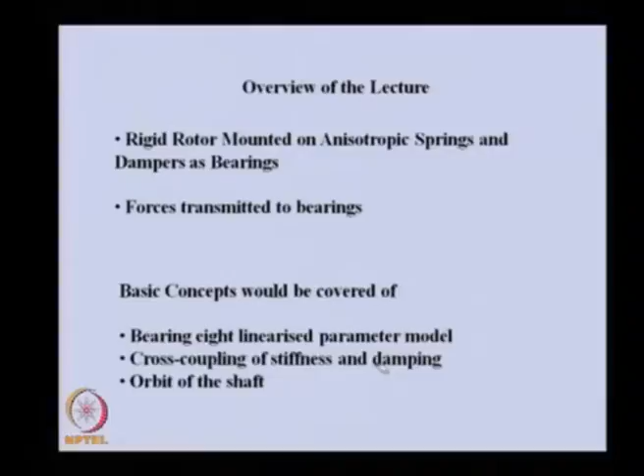This is a rigid rotor mounted on an anisotropic spring and damper as bearings. Then we will also study the force transmitted through the bearing from the rotor, and we will cover the following concepts in this lecture: bearing linearized parameter model, cross coupling stiffness and damping, and orbit of the shaft.

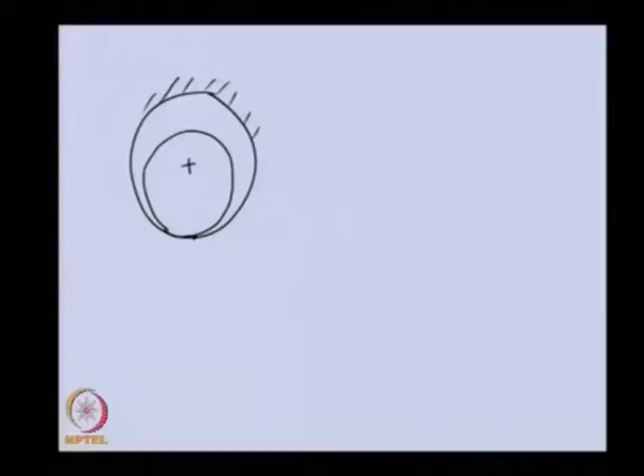So, let us take a hydrodynamic bearing, and in this particular bearing, this is the bearing center. When the journal which is inside is not rotating, then we expect it will be resting at the bottom of this bearing, where omega is 0 for this particular case.

But when this particular speed increases, you can see whatever fluid is here, in the clearance, it will try to go into this particular wedge, and because of this the pressure will be generated at the wedge, and this particular journal will lift inside the bearing.

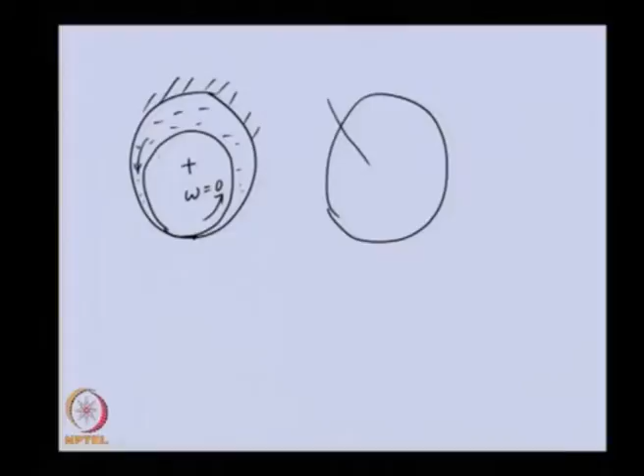So I am drawing a particular configuration in which the journal is rotating at a particular speed, and it has taken some equilibrium position inside the bearing.

Now you can see that because of the rotation of the journal, the fluid is getting pumped into this wedge part, and because of that the pressure is generated in this region, and the weight of the journal is supported by the pressure generated in the fluid film.

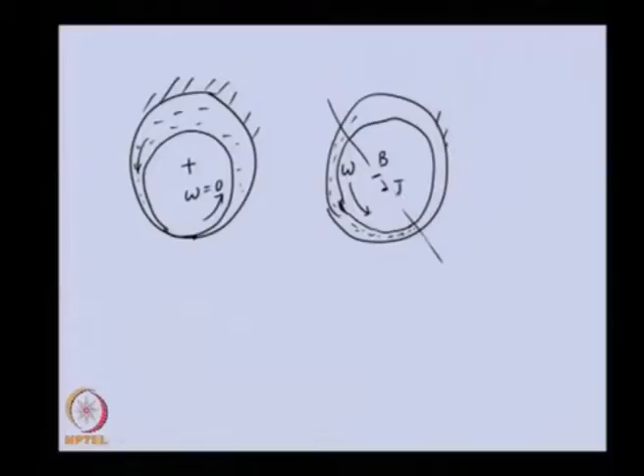In this particular case, let us say this is the bearing center and this is the journal center. This journal center and bearing center are offset by some amount. Let us say Bj is the radial eccentricity, and if we draw a vertical from the bearing center, this particular angle is called the attitude angle, which defines the position of the journal.

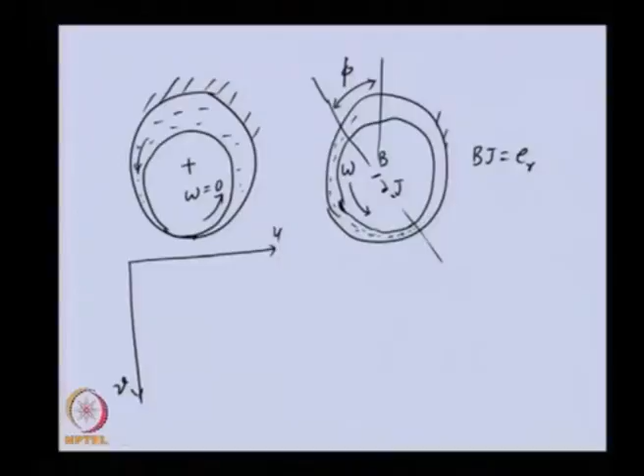So if we want to plot the journal motion, how it changes its location with respect to speed, because for a particular speed it occupies a certain position inside the bearing, you can see that at rest it is here. This is the journal center, this is the bearing center.

Now, as speed increases, it changes its position, and theoretically, when speed is at infinity it reaches B, meaning both the journal center and bearing center will be at the same place. So we can say that as speed increases, the shaft center takes this particular path, and for one particular speed it will occupy this particular position, and this is the radial eccentricity which we have drawn here, the Bj.

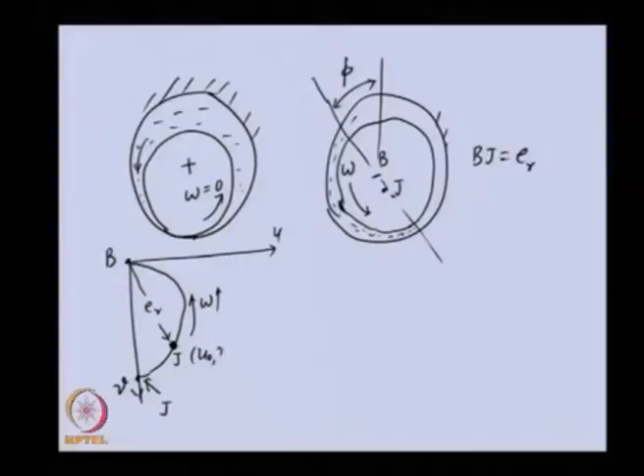This is the general position. Let us say at equilibrium, for a particular speed, its position is given by u naught and v naught. This is the attitude angle. So e_r and phi define the position of the journal, or we can also define it with respect to v naught and u naught.

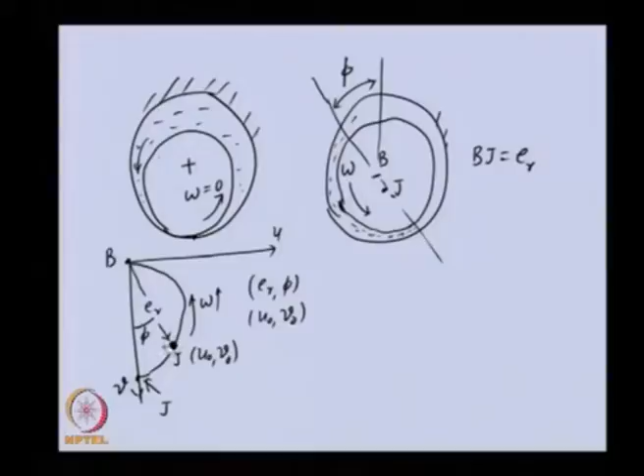Now you can see that when we are changing the speed, this particular journal changes its position, and if we talk about how the fluid film is imparting stiffness and damping to the rotor, obviously we expect that when we change the speed, when the journal position changes, it will have different stiffness and different damping properties. So now let us analyze these.

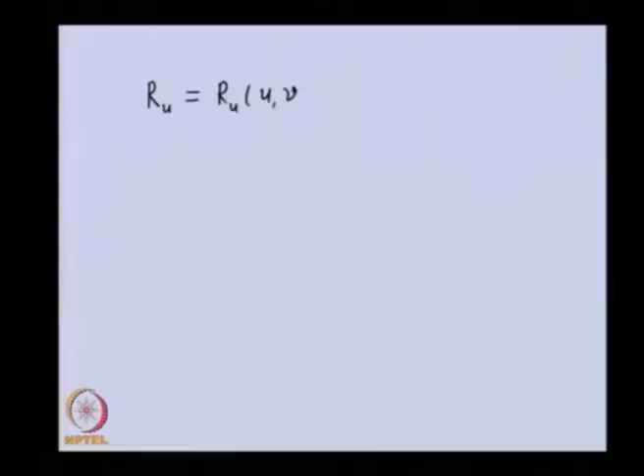The fluid film which is giving a reaction force onto the journal is Ru in the horizontal direction, and this reaction force is a function of the position of the journal and the instantaneous velocity also. The fluid force in the vertical direction is also a function of these quantities.

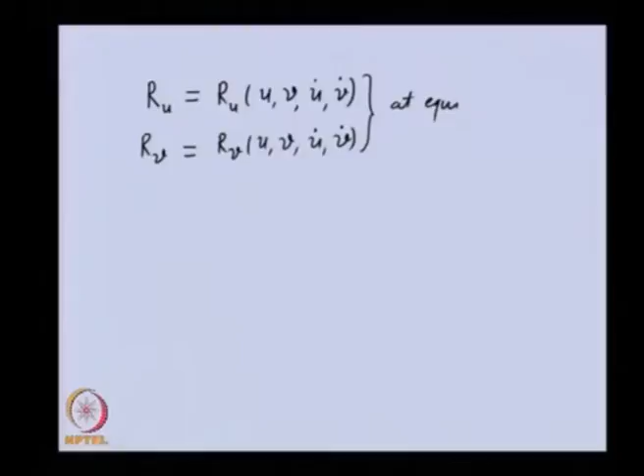So, these are the reaction forces which are coming from the fluid film onto the journal. Now, this is at equilibrium position, let us say, that means it is at, let us say, u naught and v naught.

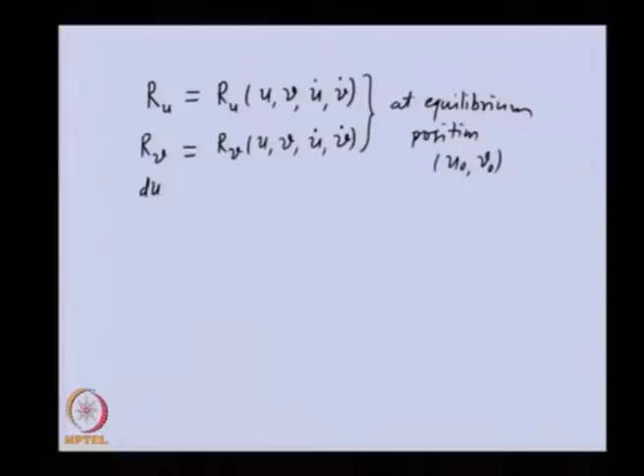If we are giving some kind of perturbation or disturbance from its equilibrium, then let us say we are giving perturbation to each of these by du, dv and its velocity components to each of these variables. So the fluid film force now will be written as, so this fluid film force we expect that it will be changing because of this disturbance.

Like this. Similarly, this particular one is in the u direction, similar variation will be there in the v direction also. This particular function we can able to expand using Taylor series expansion.

So, let us say the reaction force in u direction due to the equilibrium position plus the variation components. So this is the variation in du, then variation in dv, and the velocity components. These are the velocity components.

Similar variation we can able to express in the v direction. So this will be v plus dv.

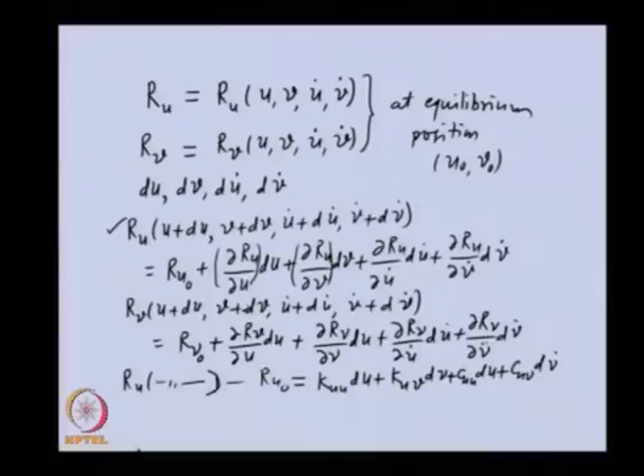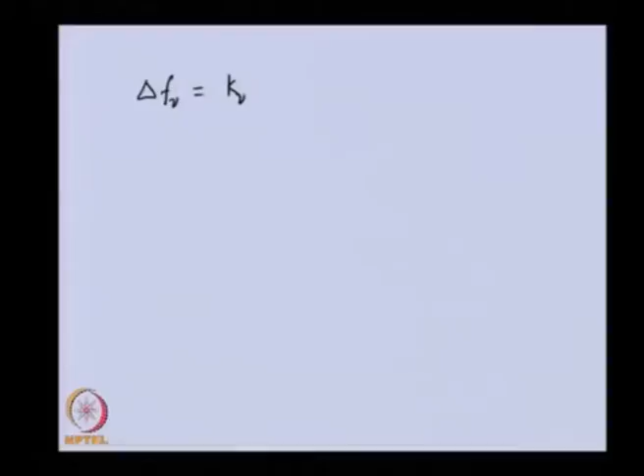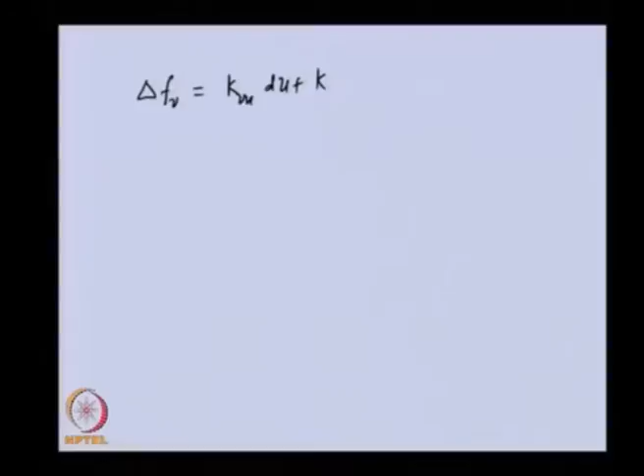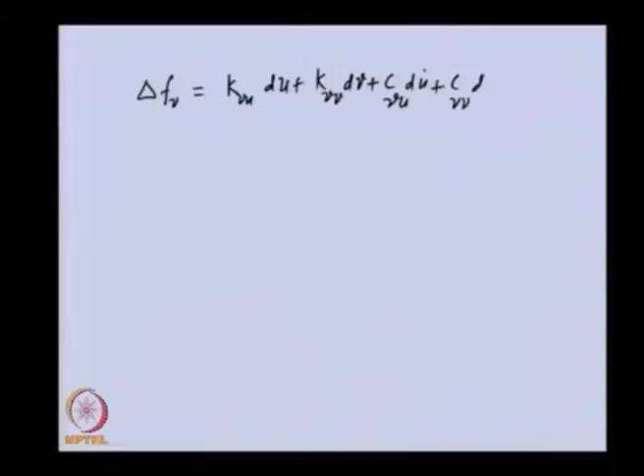So you can able to see that this k and c which we have represented, this is representing the change in the force for a small perturbation in the displacement, and this is representing the change in the force due to the change in the velocity.

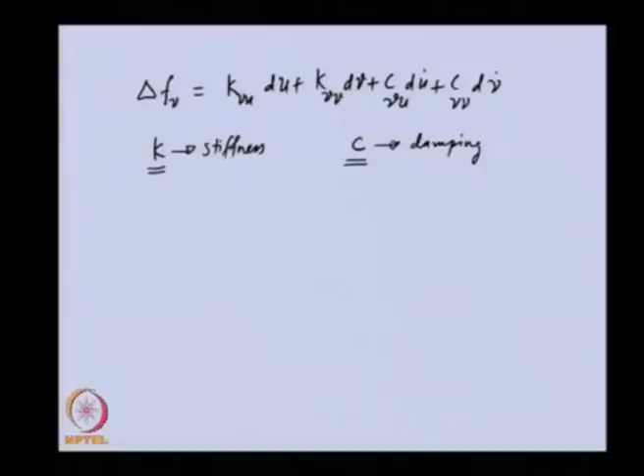So actually this is nothing but the stiffness, which is defined as change in the force with respect to the displacement, and this is the damping coefficient, which is defined as change in the force due to the velocity. So these are stiffness coefficients and damping coefficients.

So if we take one particular coefficient, let us say u v, this is representing change in force, fluid film force in u direction, divided by change in displacement in the other direction, that is in the v direction, because I have taken the different subscript v direction. So this particular stiffness...

So this particular stiffness is the k u v I have defined, in which we are taking the force direction u, the change in force in u, and the displacement in the v direction. So this is a cross coupled term.

So in this particular case, if we are considering a rotor which is supported on such a bearing, hydrodynamic bearing, if you are giving a force in u direction, that is horizontal direction, there will be displacement in the horizontal and vertical direction also.

So, that means if you are giving force in the horizontal direction, displacement will take place in that direction as well as in the vertical direction. When the displacement is taking place in the other orthogonal direction, those terms are called cross coupled terms, and those terms which are giving displacement in the same plane are called direct terms.

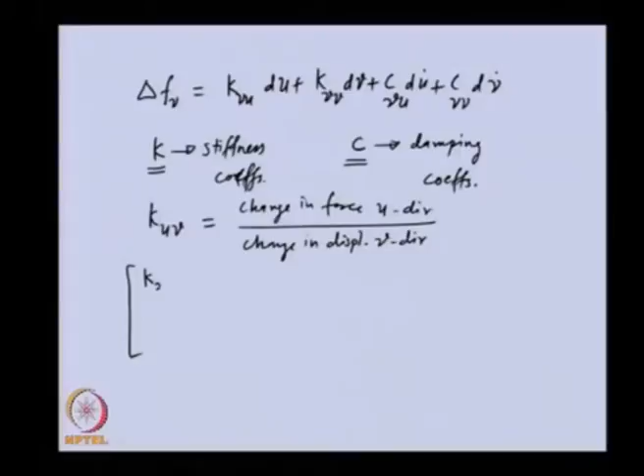So, in this particular case, we can write these coefficients like this, because we have defined four stiffness terms and four damping terms. You can see this u, KUU, KUV, and this is KVU, and this is KVV. So these are the four stiffness terms, and similarly we have four damping terms: UV, VU, and VV.

So in this, this and this are called direct stiffness coefficients, and these two are called cross coupled stiffness coefficients.

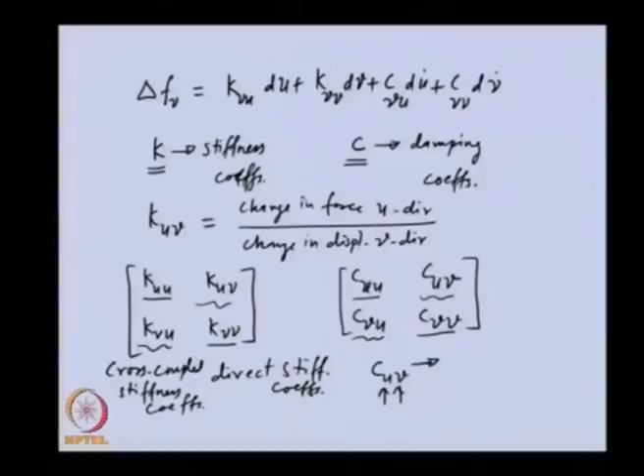Similarly, here these two are direct damping terms, and these are cross coupled damping terms. So if we want to define CUV, this is the change in force in the u direction due to change in the velocity in the v direction. So change in force in the u direction due to change in velocity in the v direction.

Generally, these stiffness and damping coefficients which I defined for fluid film bearing, we have seen that they are 8 in number, 4 for stiffness terms and 4 for damping terms. They can be calculated by either calculating the change in the fluid film force for a given displacement in a particular direction.

This change in the fluid film force can be calculated using the lubrication theory, using the Reynolds equation, or sometimes people perform experiments where they give particular displacements or velocity and measure how much the fluid film force changes. With the help of these ratios we can get these stiffness and damping coefficients.

Now, once we have the idea of this particular model, we will analyze a rigid rotor which is mounted on these kinds of bearings having 8 linearized stiffness and damping coefficients.

In this particular case, you have seen that when we expanded these expressions using the Taylor series, we retain only the first derivatives; higher derivatives we neglected. So basically we have linearized the fluid film forces, which are actually nonlinear in nature, so that we can do some kind of analysis by which we can understand either the critical speed calculation of the rotor, or even do the instability analysis in subsequent lectures.

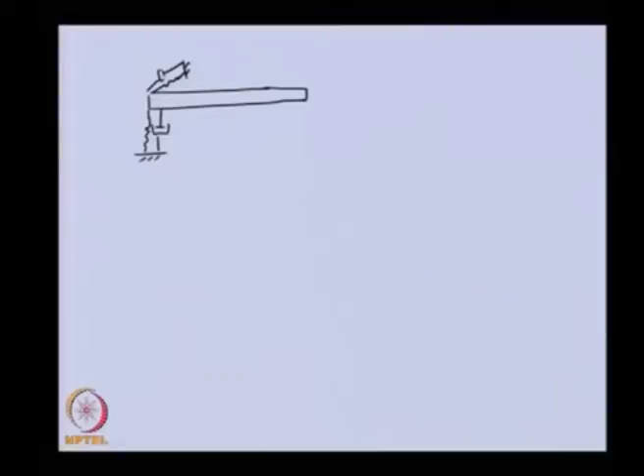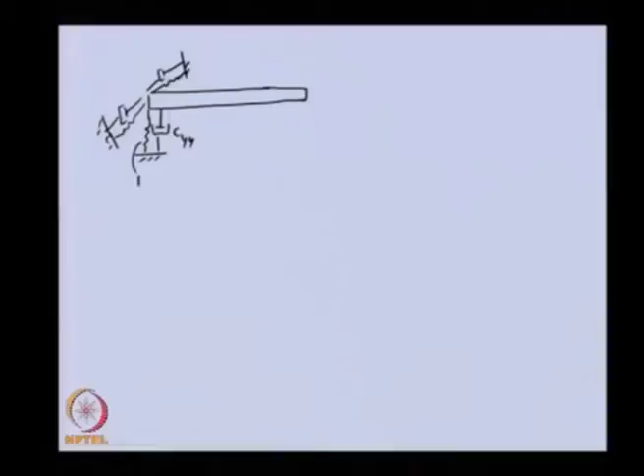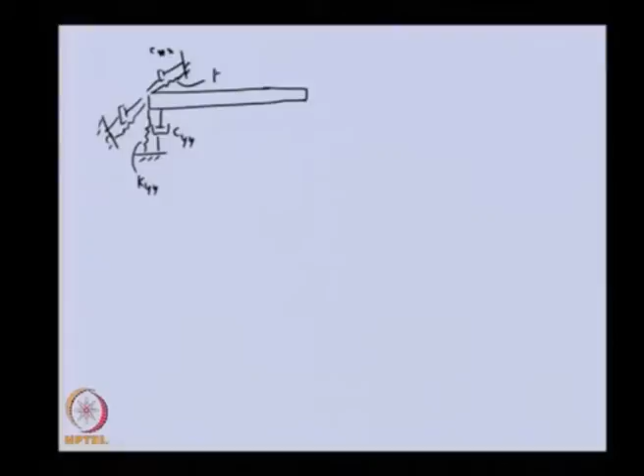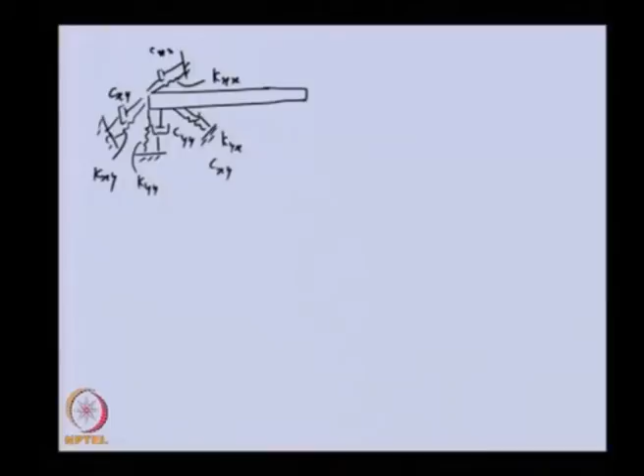Apart from these we have cross coupled stiffness and damping terms. So let me write this as Cyy, this is Kyy, this is Cxx, and this is Kxx. This is the cross coupled term: let us say this is Cxy and this is Kxy. Similarly, we will be having another cross coupled term: so these are Kyx and Cyx. And this is one end of the bearing; similarly, the other end of the bearing will be having these terms.

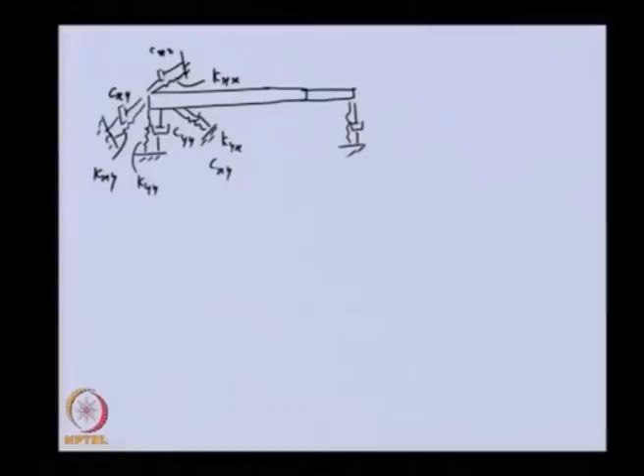So this particular rotor is mounted on two identical bearings, let us say, for this particular analysis, and is having both direct as well as cross coupled terms. So you can see there are springs and dashpots which are 8 in number at each end of the bearing of the shaft.

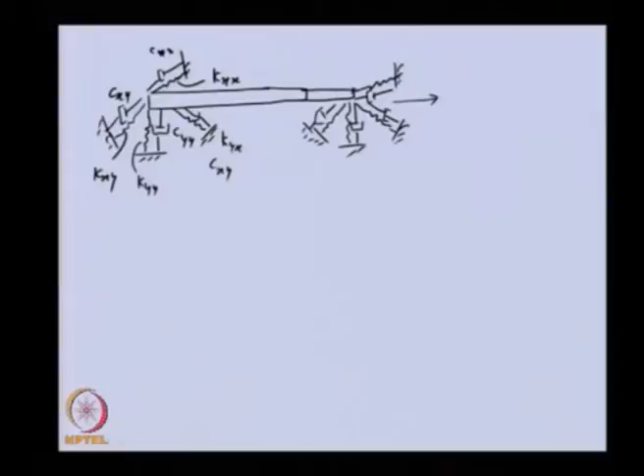So basically, in this particular case I am representing, because now I am using the x, y, z coordinate system, this is the z axis direction and we have y and x in this direction. So these stiffness and damping terms are giving the fluid film forces in the x and y direction. That is why I have changed the subscript of the coefficients to x and y.

So basically we can see that this particular rotor which is mounted on the two bearings is identical to the previous analysis. The only difference is now we have so many spring and damper coefficients attached with this.

So if we draw the free body diagram of this particular rotor on similar lines as the previous lecture, let us say I am drawing the free body diagram in the yz plane. In this particular case also, we are assuming that we do not have any coupling of the translatory motion and the rotary motion; they are uncoupled. That means if you give the shaft a vertical motion or a vertical force, there will not be any tilting.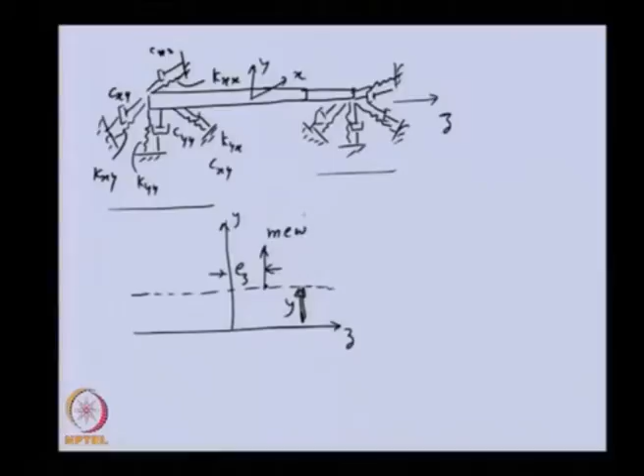So, this is the axial eccentricity in the z direction, and because it is rotating, we have this centrifugal force which is offset from the center of the shaft. Now, at the ends bearings are there, they will give forces.

This time the forces will be not only from the spring, this was the term which we used in the previous analysis, but now because of the cross coupled term we will be having some more terms, like due to the displacement in x direction, because cross coupling is now there between the two linear displacement directions. Apart from that, we have the damping term also, and we have the cross coupled term due to the damping.

So, these are the forces which are acting at the left hand. Same force, because I am considering in this particular analysis the same bearing, so the same force will act at the other end also, due to the damping and stiffness.

So, this is the free body diagram of the shaft. This dotted line represents the shaft center line, and it is acted upon by the centrifugal force here and bearing reaction forces because of displacement in the x and y direction, because now this x and y displacement we cannot separate out. So, both the forces will be coming in this particular model.

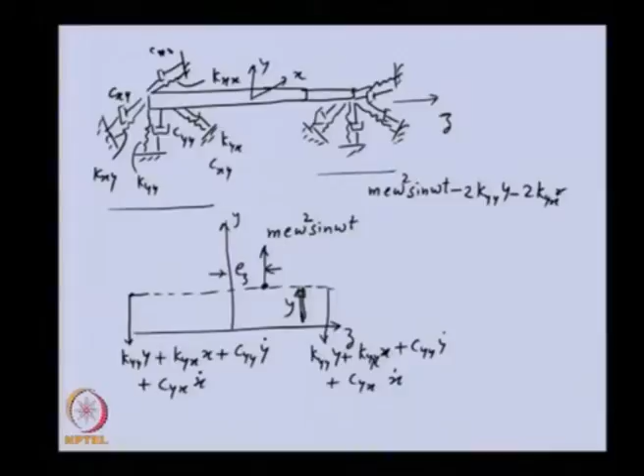And from damping, that should be equal to mass into acceleration in the y direction. So, this is one of the equations of motion.

Now, we can write a similar equation of motion if we give a motion in the x direction, or the equilibrium in the zx plane. So, that centrifugal force will be m e omega square cos omega t minus, the subscripts would change here, and here it will be 2 k x y.

And for damping we will be having c x x, x dot because of velocity, and c x y due to velocity in the y direction. This should be equal to mass into acceleration in the x direction. So, this is the second equation of motion.

These two equations, you can see that we have x and y terms in both equations, but the tilt motion is not there, because we are not considering in this particular model the coupling between the translatory motion and the angular motion.

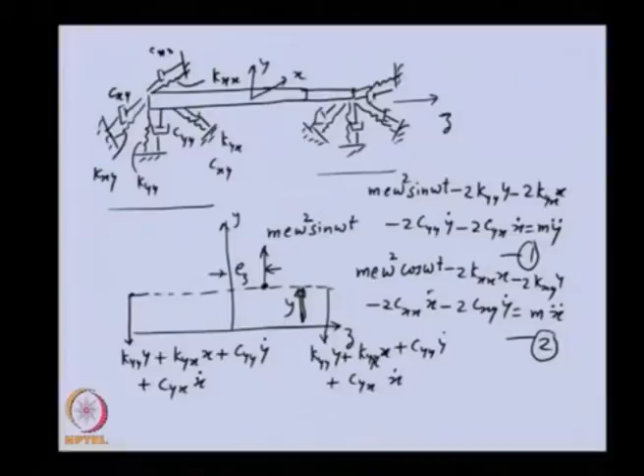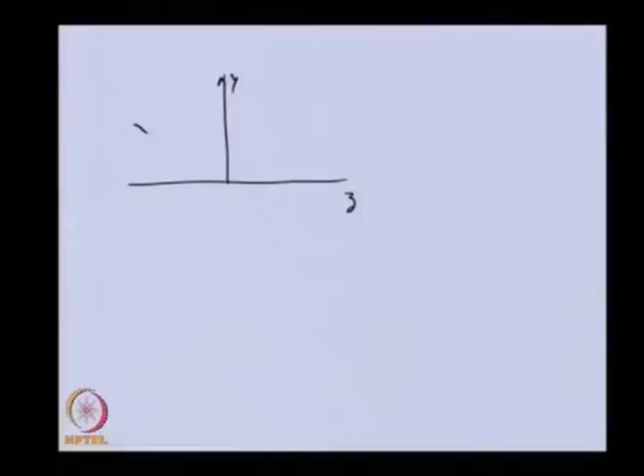Now, on the same line we can go for the tilting of this particular rotor. So, I am drawing the free body diagram in the y and z direction, in the y-z plane. So, the positive tilting direction is from y to z, and this is the tilting angle phi x, because that tilting is about the x axis.

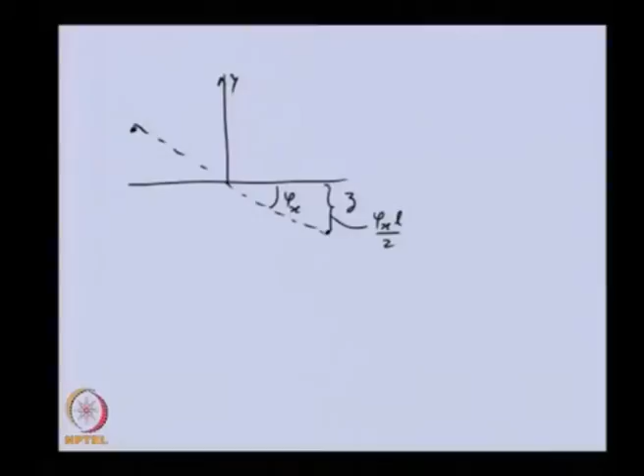Now, because of this tilt we have this much deformation of the shaft, so that is phi x, if the total length of the shaft is L, this will be L by 2, and this side also. So, you can see that here the spring is getting compressed, so the force will be upward; here it is getting extended, so this will be downward.

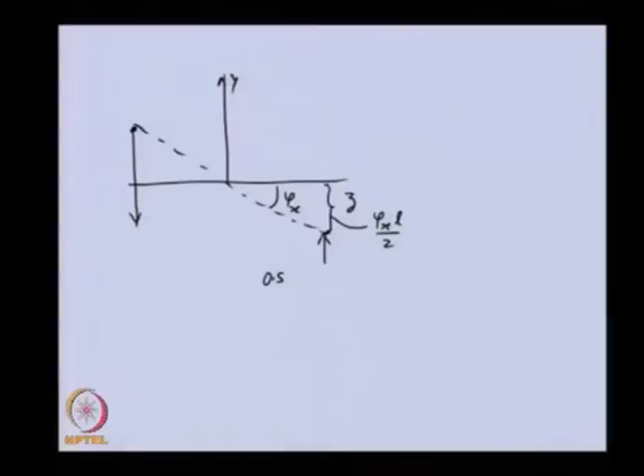This we wrote in the previous lecture. Now, apart from this force, there will be forces due to the cross coupled stiffness. This is x, this is y, because this particular force will come due to the displacement and tilt about the y axis.

Similarly, we will be having damping terms. In this particular case, instead of displacement, we will have derivative of this, and additionally due to coupling we will have another force term due to velocity about the y axis. The similar force will be there at this end also, because we have considered this bearing same as the other end.

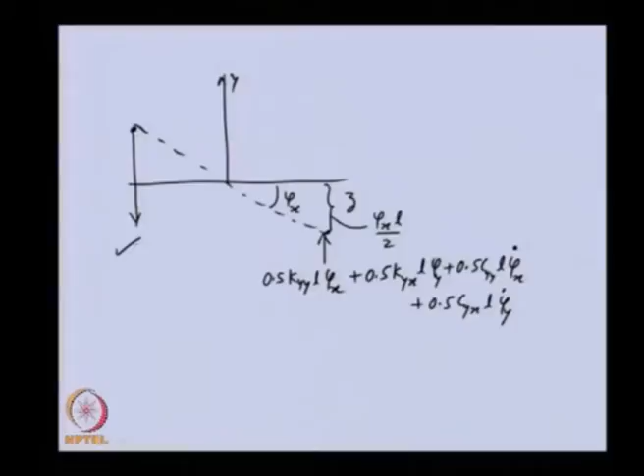Apart from that, we will be having the centrifugal force, which is at e z. So now we can write the moment equation. This particular force is acting this side also, and the moment due to this centrifugal force we can balance to the rotary inertia. So we can write a moment m e omega square sin omega t into E z is the moment.

This is giving moment in the counterclockwise direction, that is opposite to the angular displacement. So it will be negative, and this force and this force will give a moment again opposite to the angular displacement direction, so they will also be negative.

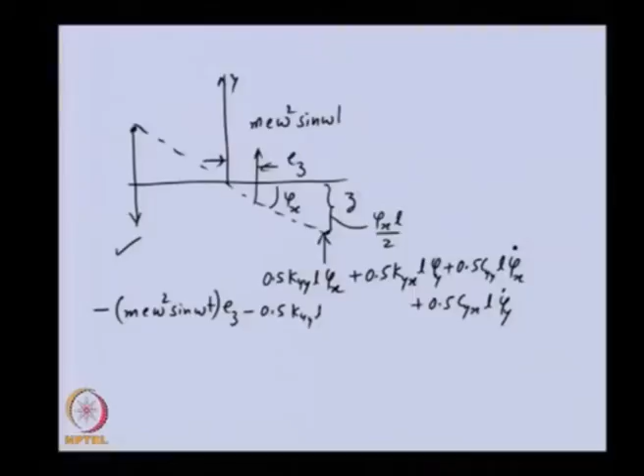So this will give us 0.5 kyy. L is the moment arm, so we will be having L square. So these are the moments now. They are negative because they are acting opposite to the angular displacements.

So here we are getting 4 terms from the fluid film forces. Earlier it was only a single term. This should be equal to the diametral mass moment of inertia of the rotor into angular acceleration in the y direction, that is in this particular plane the tilting is about the x axis. So this is another equation of motion.

On the same line we can write another equation of motion in the other plane, that is in the x z plane. Here cos omega t will come, and here the subscript would change, the angle subscript will also be changing.

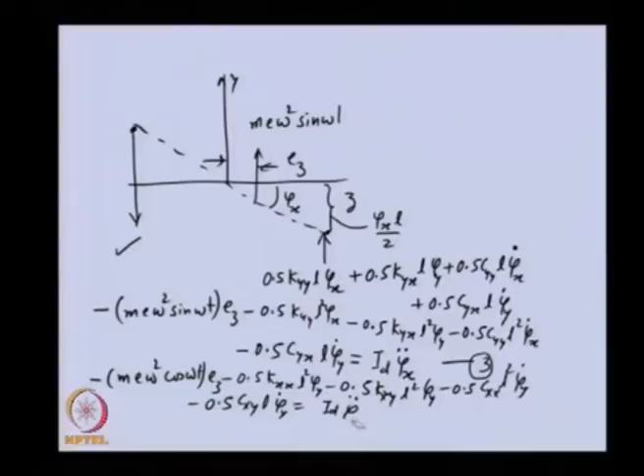X y L square phi y, 0.5 C x x. This will be C x x L square phi dot y and minus 0.5 C x y L phi y dot, should be equal to I d, this will be about the y axis. So this is the fourth equation of motion.

Now we have seen that we could get the equation of motion in 4 directions, that is in the x, y, phi x and phi y direction, and these forms of equations are similar to the previous one. Now we can put these equations in a matrix form, and we can analyze for the unbalanced response. So these equations we can put in a matrix form like this.

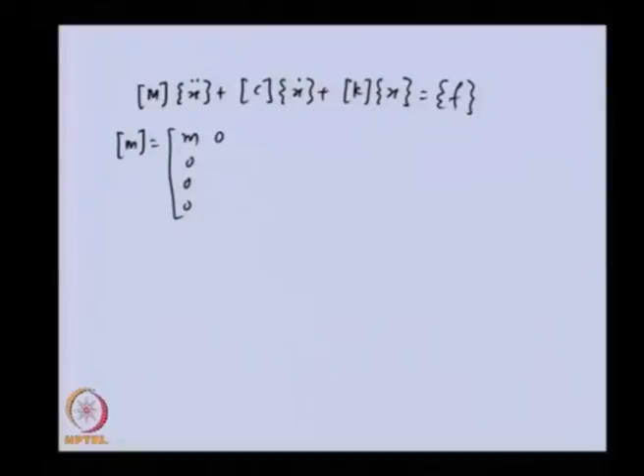Mass matrix, damping matrix, and then stiffness matrix is equal to the external force, which is due to the unbalanced force. And the form of the mass matrix for this case will be like this. It depends upon how we have stacked the displacement vector. In this particular case the displacement vector x we have stacked like x, y, phi y and phi x. The ordering of this stacking we can change without any problem, but only thing is these coefficients will change position if we change the ordering.

Similarly, the damping coefficients will be, because of the cross coupled terms, now we are getting 4 terms. Earlier only the direct damping terms were there, earlier damping term was not there totally, but now we have all 4 components, and the last 2 correspond to the moment balance. So we have 0.5 L square C x x, 0.5 L square C x y, and C y x, and this is C y y.

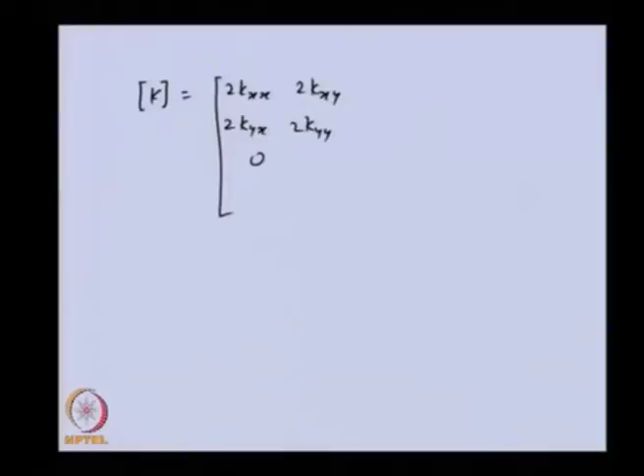Now the stiffness matrix will be having a similar form. I will give you that in the next slide. Earlier this stiffness matrix had only diagonal terms. Now because of cross coupled terms we have off diagonal terms also, and these terms correspond to the moment balance.

These cross coupled terms were not there earlier, only direct stiffness terms were there. In the previous analysis, previous lecture, we had these diagonal terms. Now these off diagonal terms are coming into the picture.

If you see these off diagonal terms, because they are getting multiplied by the linear displacements or translatory displacement, they are coupling the motion in 2 directions, and these are coupling the tilting motion in 2 directions. But these terms are 0, which represents that there is no coupling between the linear motion and the angular motion. So here you can see these are 0, meaning the linear motion and angular motions are not coupled for this particular analysis.

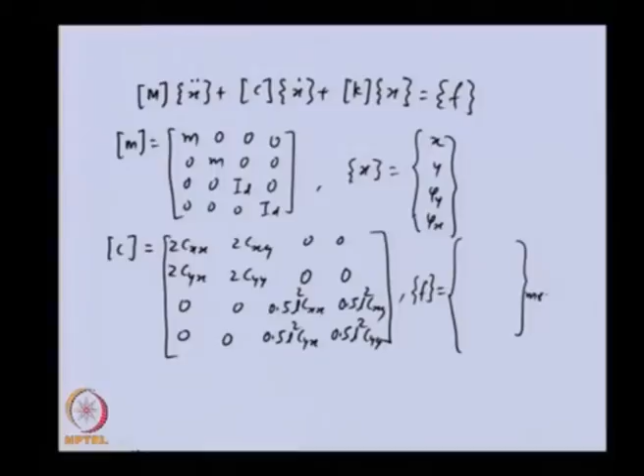So once we have defined all the matrices, only the force is left out. The force we can write here. The force will take the shape of, taking m e omega square as common, apart from that we have cos omega t and sin omega t in x and y direction. These are forces, and then moment will contain E z also apart from cos omega t and sin omega t. So this is the force, the external force vector.

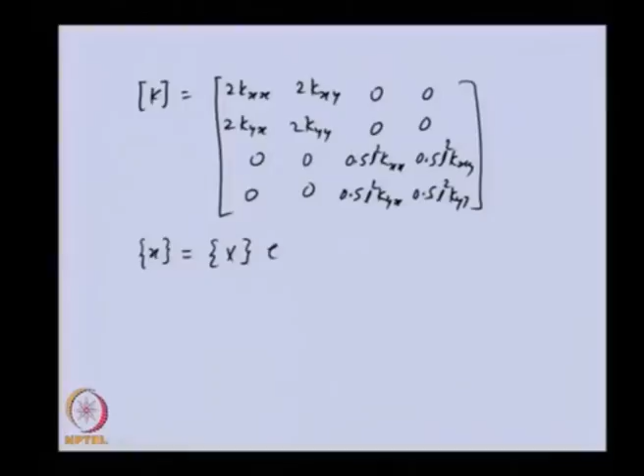Now this can be solved using the procedure described earlier. We can assume the solution of the response as complex amplitude and e to the j omega t. This will give us x dot as j omega capital X e to the j omega t, and acceleration double dot of this will give minus omega square x e to the j omega t.

This solution can be substituted in the equation of motion, and we can get minus omega square m, taking x common, then j omega c plus k, taking x common, X e to the j omega t.

The force vector, which was there for unbalance, we can write as amplitude and this time dependent term, which we earlier defined, how this cos omega t and sin omega t can be written in this form. So this will give us e to the j omega t, and this will get cancelled.

If we define this particular matrix as A, so the unbalance response we can get as inverse of A into force. So this is the solution for unbalance. We can solve this unbalanced response x, which is having 4 components in linear displacement and angular displacement in 2 directions.

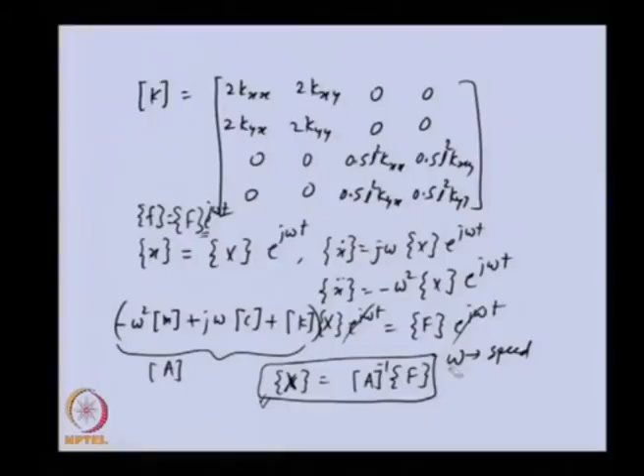So you can see here, omega, the spin speed of the shaft, is variable. We can solve this particular response for various spin speeds, and we can plot how these are varying with speed. Wherever we coincide the natural frequency with this speed, resonance will take place. Those are the critical speeds.

Now this particular problem of rotor supported on anisotropic bearing, we will see through one numerical example how this unbalanced response can be obtained for various speeds. For this, I have taken one problem in which we are obviously interested in the transverse critical speed for the rotor bearing system, which is supported. This is a rigid shaft which is supported on 2 anisotropic bearings.

The shaft is symmetric, and the length of the shaft is 1 meter. The diameter of the shaft is 0.05 meter. The mass density is given.

The shaft is supported by flexible bearings, and we are considering motion both in the vertical and horizontal plane, because we are considering the bearing property with 8 coefficients, that is 4 for damping and 4 for stiffness. So these are the stiffness properties, kxx, kyy, which are direct stiffness, and these are cross coupled stiffness. They are generally relatively smaller in magnitude as compared to direct stiffness. And similarly, the direct damping terms and cross coupled damping terms are there.

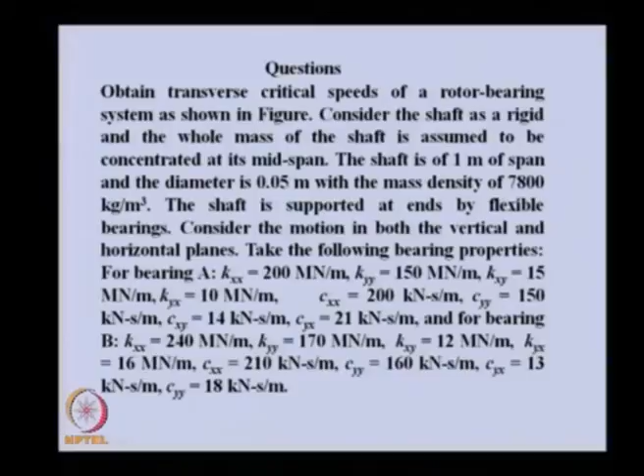So this is the shaft, a rigid shaft supported on 2 different bearings, and some more data are there. We need to get the unbalanced response.

So what we are doing is obtaining the natural frequency of this system, and also through unbalance we are obtaining the critical speed, and cross verifying whether we get the same values through free vibration and forced vibration. In this particular unbalanced response, we will be having this particular eccentricity of the unbalance.

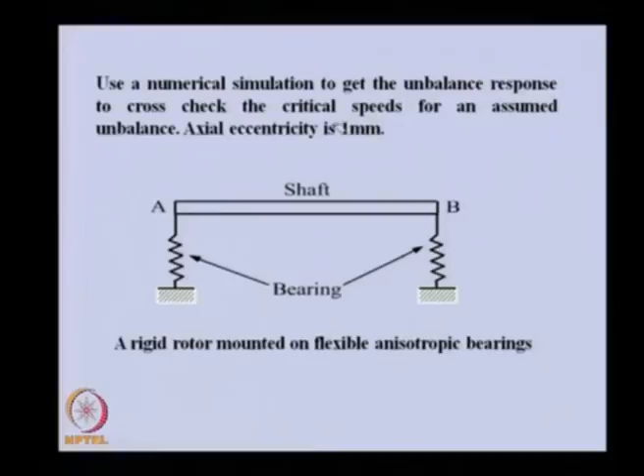We already defined earlier the mass matrix. We can calculate it because we have all the geometry and material property of the shaft. We can get the mass and diametral mass moment of inertia of a cylinder, which is the rotor, given by this expression, where r is the radius and l is the length of the rotor. m is the mass of the rotor, which we can get from here. Rho is the density of the material, L is the length of the shaft. From this we can form the mass matrix.

The stiffness coefficients which we have can be given as this stiffness matrix. You can see these two stiffnesses from two different bearings are getting added up here. So there is a small change in the stiffness matrix we obtained earlier. It was symmetric, so we had 2 kxx, but now they are different, so we are adding them separately. Similarly for this. If we substitute the given values of stiffness and length, we can get the stiffness coefficient matrix like this. In this particular case, as I told, there is no coupling, only the coupling is in the translatory motion or in the tilting motion.

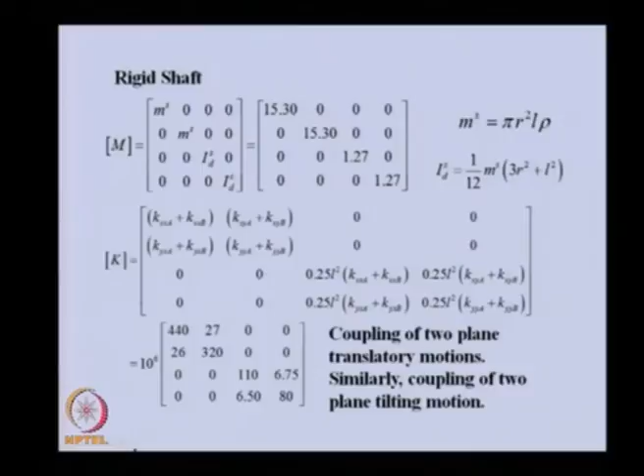This is the damping coefficient, and if we substitute the values, we get this particular damping matrix. This force vector is given by this, in which force and moments are there. This is the stacking of the response vector.

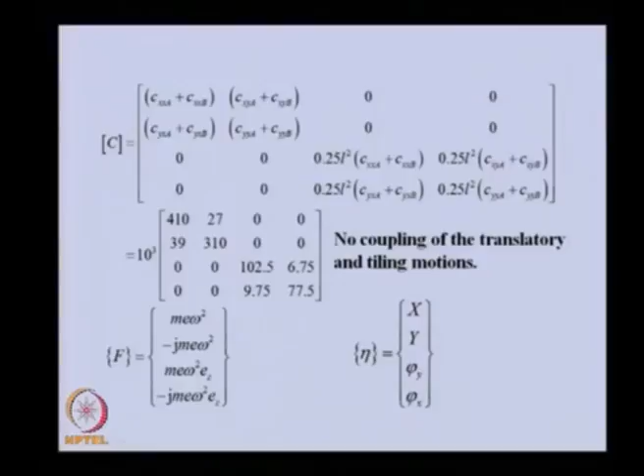So the equation of motion is like this. For free vibration and undamped system, we can neglect the force and damping, and we are left with this particular equation, which we can solve as an eigenvalue problem, and this will give us the critical speed. These are the 4 critical speeds we get from the eigenvalues. Basically these are natural frequencies, so the eigenvalue problem gives this natural frequency.

Now for forced response, we can use this directly, without damping or with damping. So this is the unbalanced response, where D is this whole matrix. We can solve this for various values of speed, and plot the response like this. This is the speed variation, with one of the amplitudes of displacement taken here, and this is the phase of the displacement. These are the linear plots in the x direction and y direction.

You can see we get 2 critical speeds here corresponding to resonance, and there is a change in the phase also. In the other plane also we are getting the same critical speed, because these two motions are coupled, and they are around between 4000 to 6000, corresponding to the first two.

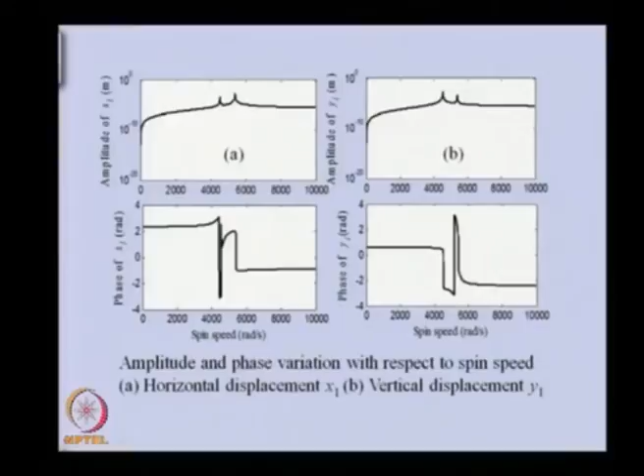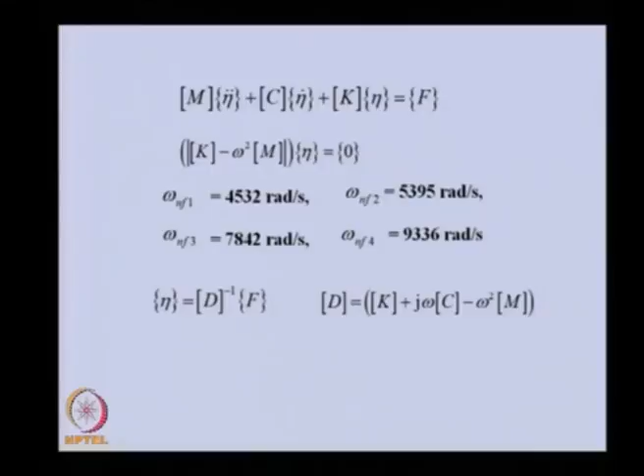Today's lecture, we have seen initially the basic concept of the hydrodynamic bearing, how this particular bearing fluid film forces impart stiffness and damping, and we have defined the stiffness and damping, both the direct stiffness and cross coupled terms, which couple the motion in 2 planes.

With this concept, we then analyzed a rigid rotor mounted on this kind of fluid film bearing, and derived the equation of motion. We even solved a numerical example, and we have seen that the free vibration analysis, undamped analysis, and the unbalanced response give critical speed calculations that are nearly the same.